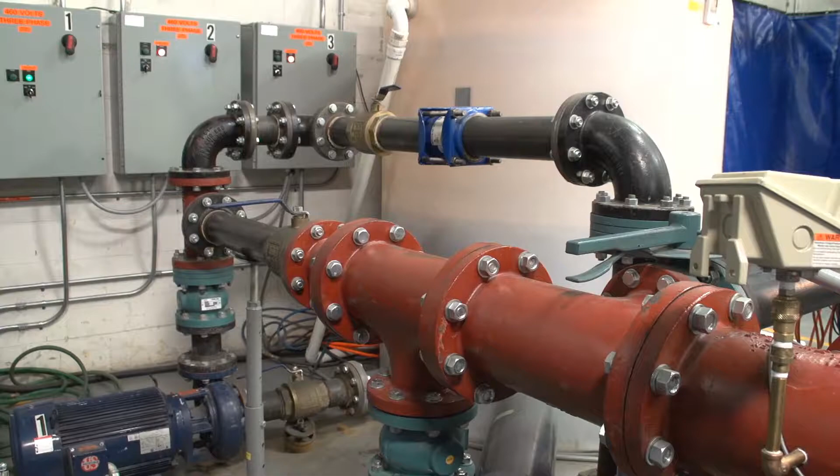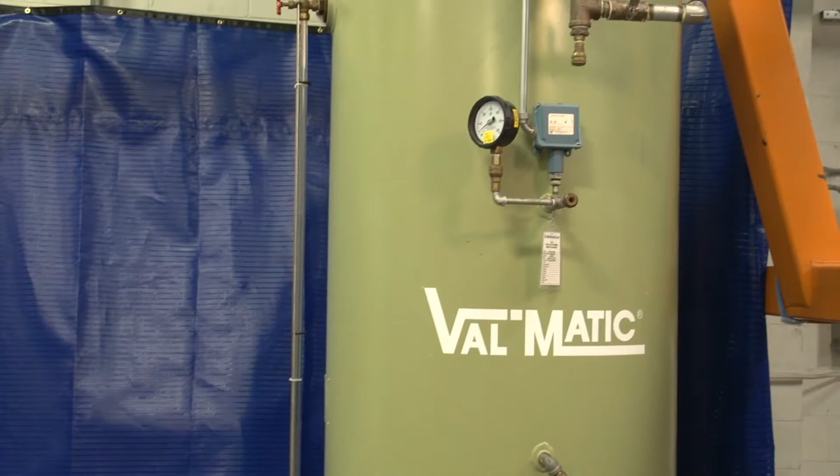The Val-Matic flow loop consists of a battery of pumps that pump water from a 1,000-gallon storage tank through various test lines to a 400-gallon hydropneumatic tank, which we can pressurize up to 150 psi. Today we have the flow loop configured to do side-by-side check valve testing. The valves are mounted in two parallel pipes using the same type of pipe fittings so that they see identical flow and pressure conditions. The flow velocity will be measured using a digital flow meter.

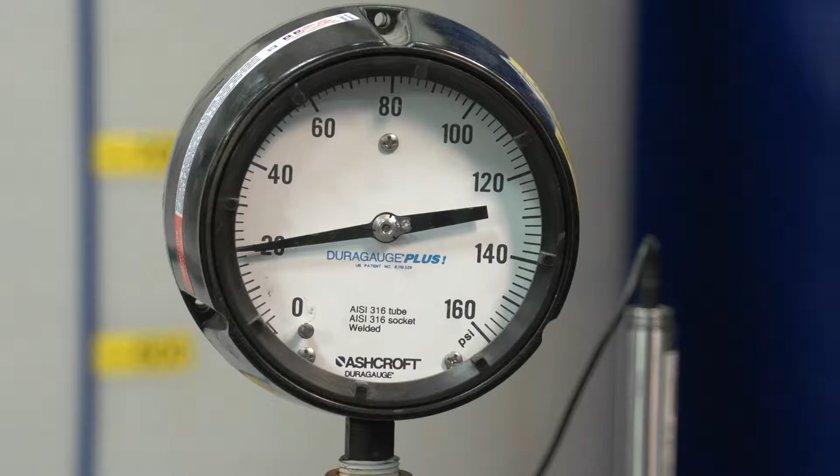The pressure can be seen on the pressure gauge and will also be recorded using a pressure transducer and laptop computer that records the pressure 100 times per second. As we pump water into the closed tank, the water level will rise, compress the air in the tank, and increase the static pressure in the line.

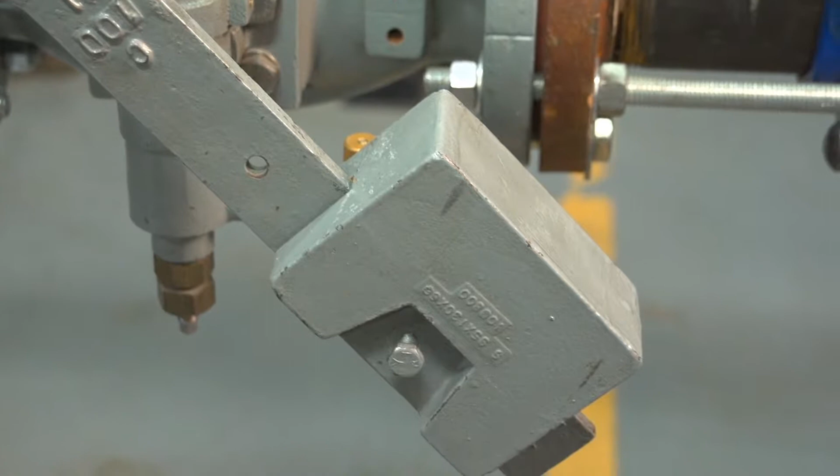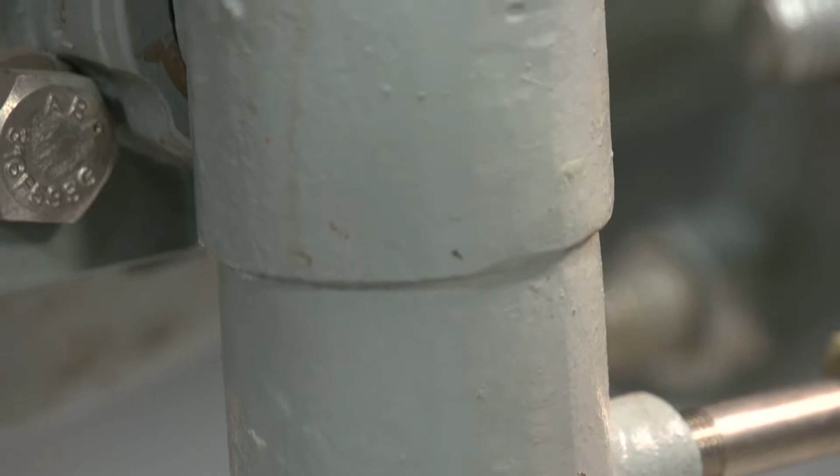The first valve we're going to test is a 4-inch swing check valve equipped with external lever, weight and air cushion. A conventional air cushion is designed to draw free air into the bottom of the cylinder and vent air out of the top of the cylinder as the valve opens. Then, when the valve closes, the release of the compressed air in the lower cylinder is controlled using a flow control valve on the bottom cylinder port.

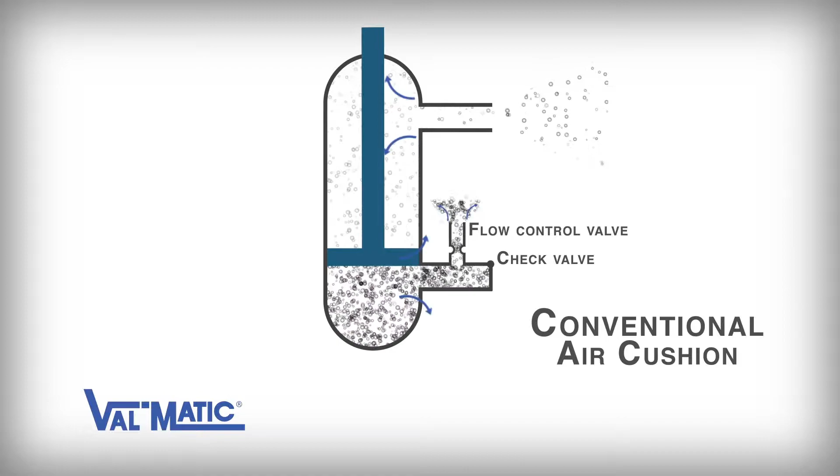A conventional air cushion works very similar to the air cylinder on your storm door at home. As the door opens, air is drawn into the air cylinder. Then, when the door closes due to the force of a spring, the compressed air cushions the closure of the door so that it does not slam.

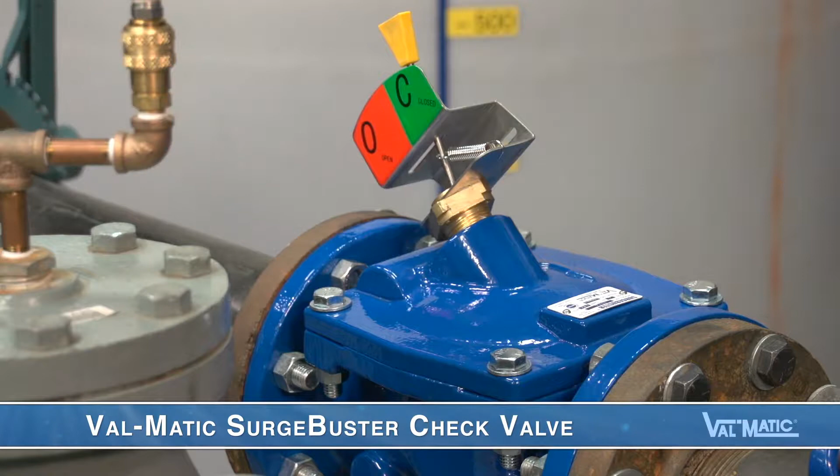The second valve we have is the Val-Matic SurgeBuster check valve, which has an internal disc accelerator or spring, and therefore has no need for an external lever, weight, or air cushion. The SurgeBuster works differently than the air cushion check valve. When the forward flow is stopped, the disc accelerator in the valve immediately begins closing the valve in a rapid manner.

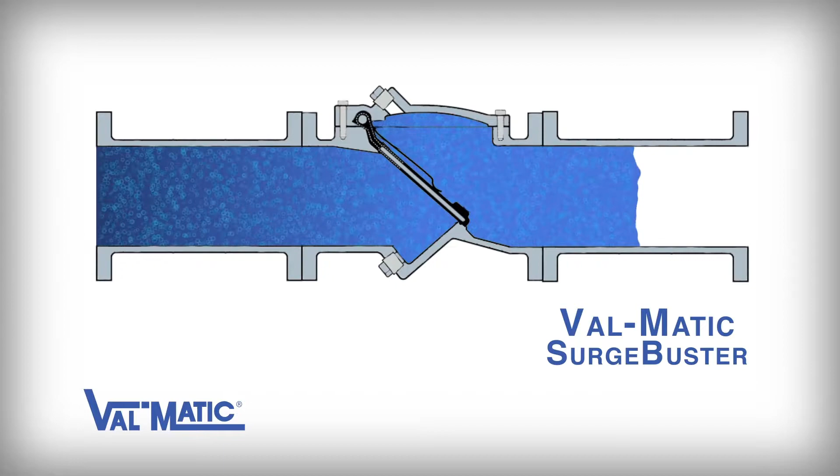Check valve slam is caused by the sudden buildup of reverse flow after the pump is stopped, being followed by the sudden stoppage of that reverse flow by the check valve. We have learned that the faster the check valve closes, the less reverse flow, and hence the smaller slam. Now we will move on to the test.

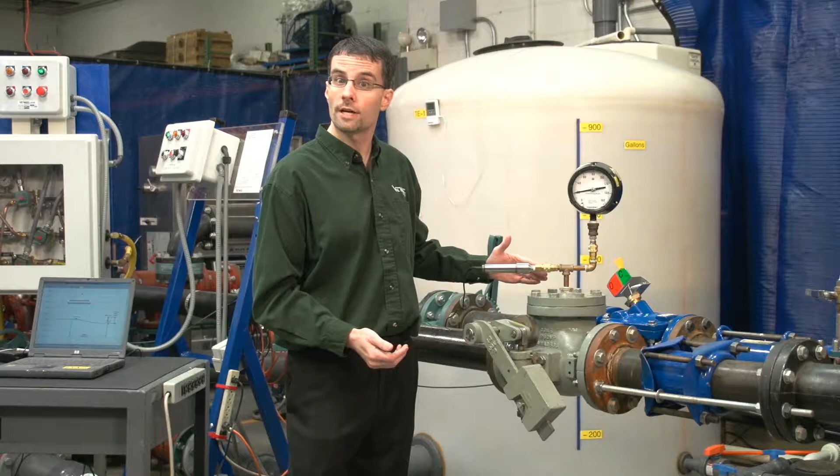To demonstrate the effect, we're first going to pump water through the conventional air cushion swing check valve and into the hydropneumatic tank. When the pressure reaches 80 psi, a pressure switch on the tank will trip the pump. Then, in a fraction of a second, the air in the tank will stop the flow and reverse it rapidly back toward the check valve. Let's start the pumps.

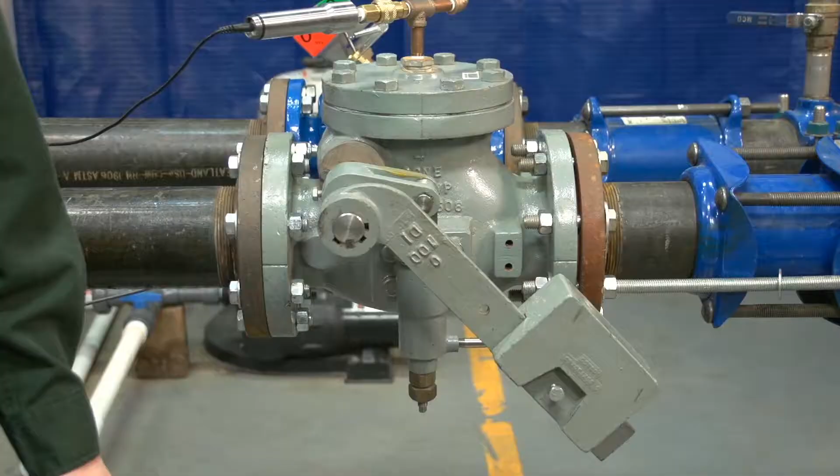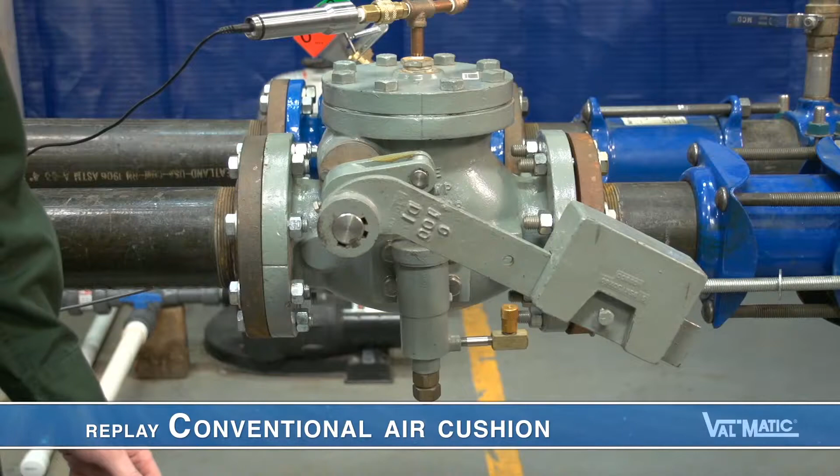We can see the valve is opening and the flow is about 9 feet per second and pressure is building. And there we heard a significant slam. We just saw the pressure reach 80 psi, the pump trip, and slam the check valve closed.

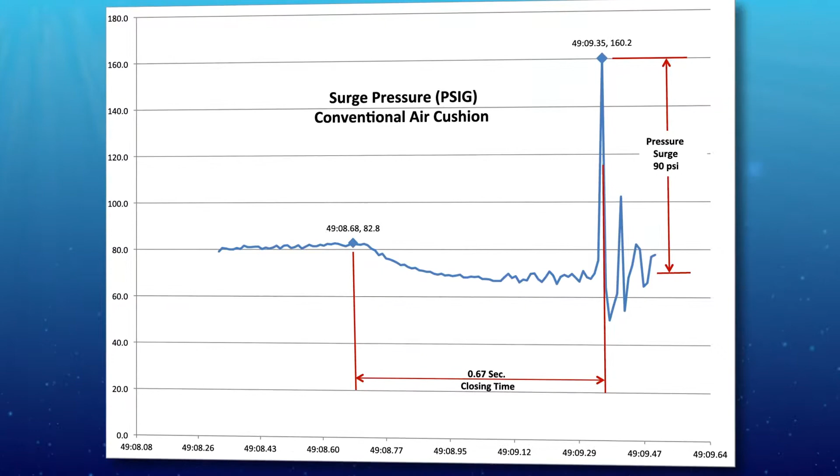Looking at the laptop results, the check valve slam produced a pressure surge of about 90 psi over the static pressure in the tank. Also note that the valve closing time was 0.67 seconds. The reason we heard a slam is because the water flow reversed and went backwards through the valve before it closed. Then, when the valve closed suddenly, it stopped the reverse flow almost instantly, causing the water hammer.

The solution to preventing slamming in this type of check valve is to get it closed faster before the reverse flow can develop. Unfortunately, a conventional air cushion tends to slow down rather than speed up the closure of the valve. This allows the reverse flow to increase. And then, when the reverse flow pushes violently on the disc, the air in the cylinder is compressed and cannot prevent the disc from rapidly closing, causing the slam.

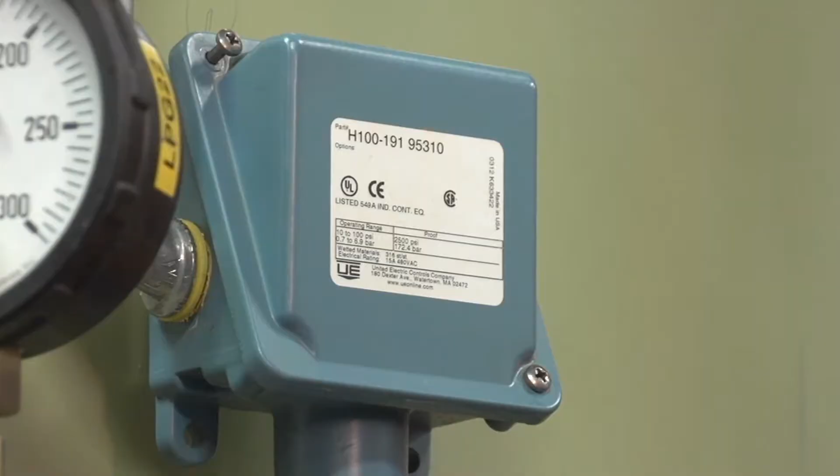As we learned, the Val-Matic SurgeBuster check valve operates on a different principle that allows it to close faster. We will now pump water through the SurgeBuster check valve. Again, when the pressure reaches 80 psi, the pressure switch on the tank will trip the pump. Then, in a fraction of a second, the air in the tank will stop the flow and reverse it rapidly back toward the check valve. Now, let's start the pumps.

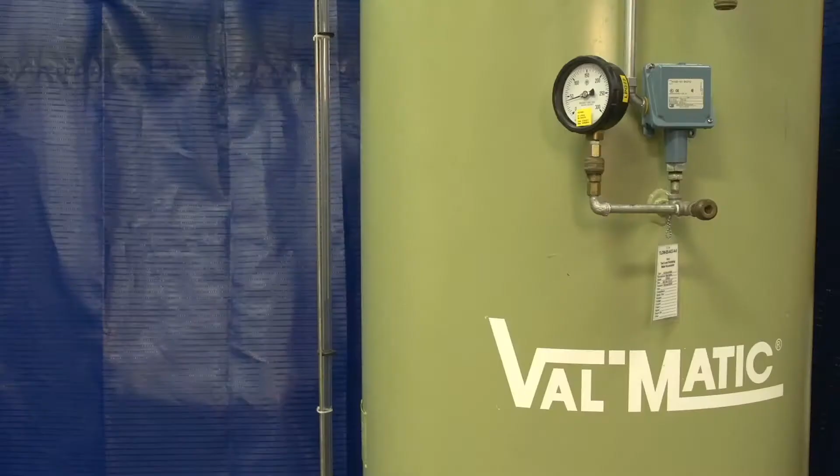You can see that the valve is opening and the pressure is building. And there we have silent closure. We just saw the pressure reach 80 psi, the pump automatically trip, but in this case there was no audible slam.

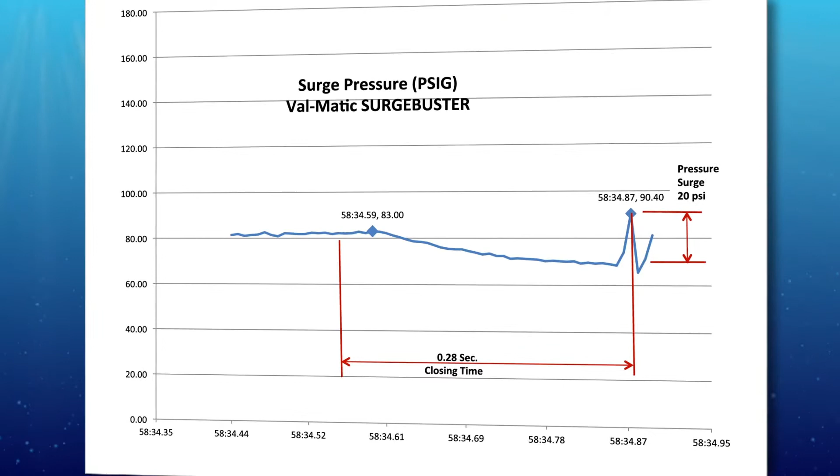Looking again at the laptop results, the check valve closure produced a surge of only 20 psi over the static pressure in the tank, which, as we heard, was virtually silent. Its closure time was 0.28 seconds versus 0.67 seconds for the conventional check valve. By closing faster, the SurgeBuster had no slam.

We have just seen that the Val-Matic SurgeBuster check valve closes faster than a conventional air cushion swing check valve, which reduces the check valve slam. These check valve demonstrations mimic common applications in the field, such as when multiple pumps are used to deliver water or the pump station is being protected from surges with the hydropneumatic tank.

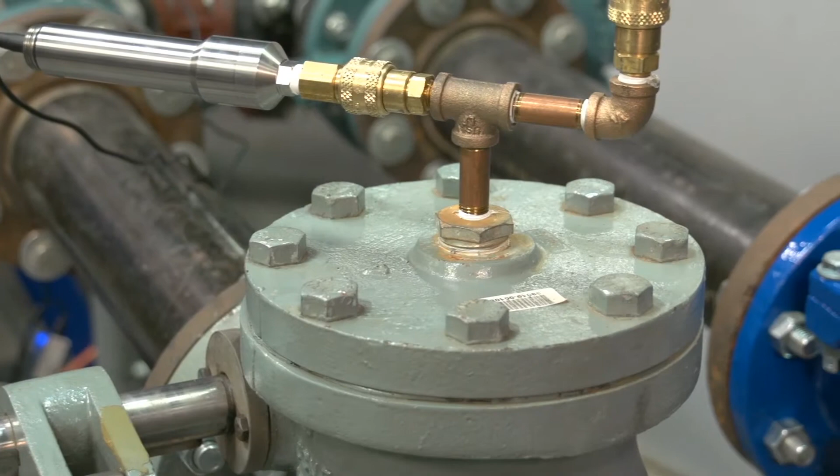In both of these scenarios, the flow reversal will be rapid and most check valves will slam. When using a swing check valve in these cases, it's beneficial to select the fastest closing check valve available, like the SurgeBuster. Thank you for your interest in Val-Matic products.